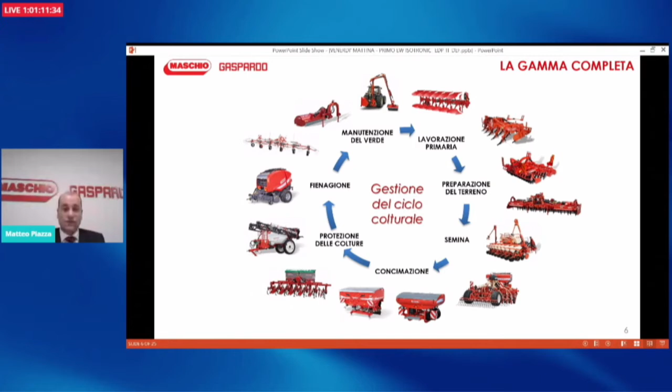So we can support our customers in all their activity, in the entirety of the cycle, the full cycle. Even though we've got long seasons, we can support our customers 365 days a year.

Now let me go back to the Primo spreader, which is the topic of today's webinar. So what are we discussing? There is a range of Primo products.

Primo is a spreader that was designed completely in our plants in Italy. It was developed, designed and manufactured. It is being manufactured in Italy.

We are now providing the market with a spreader that can be used in different circumstances, from 1,200 liters to 3,200 liters. So huge machines as well, which means that we can help private farmers, large companies, contractors.

And Primo is divided into three types. One is a totally mechanical machine, so regular manual settings, and one with some electrical motors added.

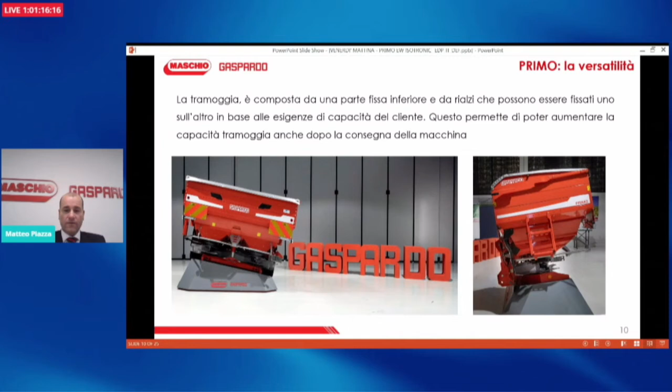If some years later the farmer buys a more powerful tractor in terms of lifting capacity, the farmer does not have to buy a new machine. It simply can use the same machine but with an expanded load capacity.

Now, this is the internal part of the machine. There are two removable grates which are here.

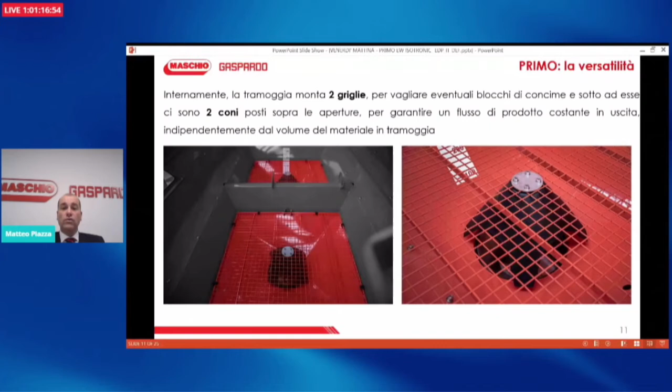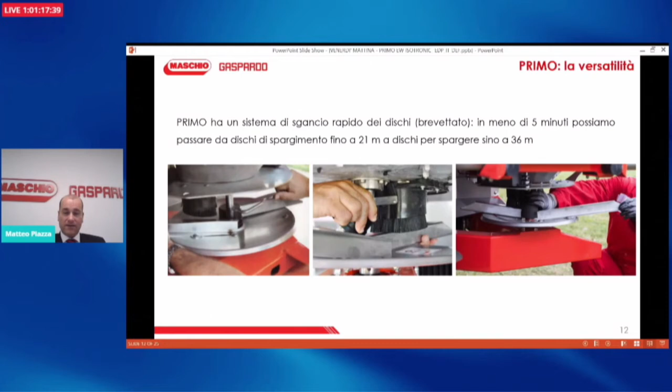It's a quick release system, so you can change discs in less than 5 minutes, from a 21 meter disc to a 36 meter disc. In just 5 minutes, you can change from a 21 meter disc to a 36 meter disc.

Let me now go to the weighting. What do we mean by EW, electronic weighting? The configuration I'm going to discuss is the Isotronic, Primo Isotronic. This machine can work, can be retrofitted with isobus tractors.

The frame is made of two parts. The hopper is connected to the third point through these devices and pulleys, and there is this connection of the hopper so that the machine can be decoupled from the tractor mechanically, so that all the weight of the fertilizer and the hopper can be detached from the tractor. The weighting cell, where the whole weight is measured, is under the third point of attachment connection. So the whole frame, etc.

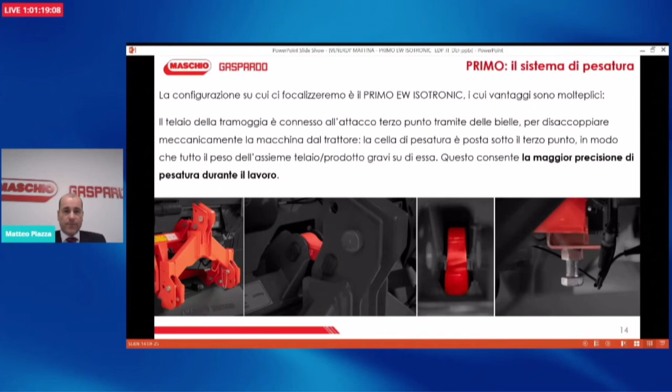This design allows a very accurate weighting. With one reading of the device, we can get the exact weight because of the design of the machine, so we can know exactly how much fertilizer is really being spread.

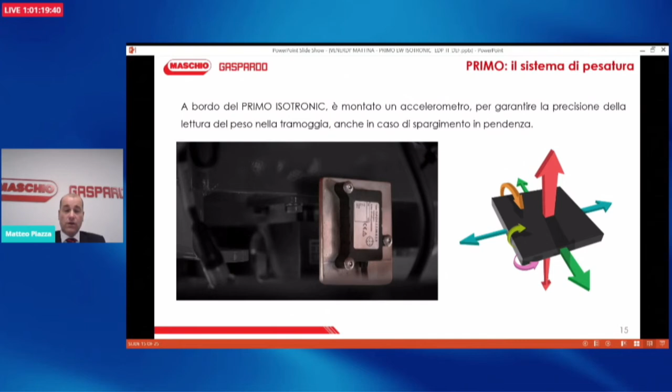Since this is a highly professional machine, we've also included in the standard machine an accelerometer. Why? Because we want to give farmers and customers the ability to spread in hilly terrain and flatlands with the same precision, since a single loading weighting cell can give us exactly the amount being spread.

Now let's go further into detail. A distinctive feature of the Primo is the use of two gates, as I was saying. Why have we used two gates and not a single gate?

We decided to use two gates, both with an electric motor, so that gate A is controlled by an electric motor controlled in speed, so in the minimum time I can open or close spreading, whereas gate B is controlled by a different electric motor, which is controlled based on position, giving better accuracy of the position on the actual cones of the fertilizer.

If we use the two electric motors at the same time, this combined use makes spreading really very accurate. It gives us assurance about the accuracy of the dose per hectare, but also the guarantee that the right amount of fertilizer is spread in all parts of the field.

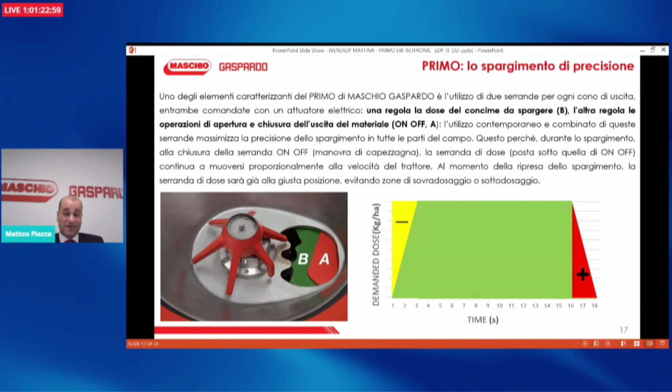On the right-hand side there is a plus. In that case, if I close the gate and I have a single gate, the gate requires time to close, so I would give more fertilizer than needed. So it's a real optimization of the dose per hectare, but also the uniformity across the whole field is ensured.

In this case, the spreading can be modified at any point. We call this Section Control Pro, because this further improves the accuracy and quality of the machine.

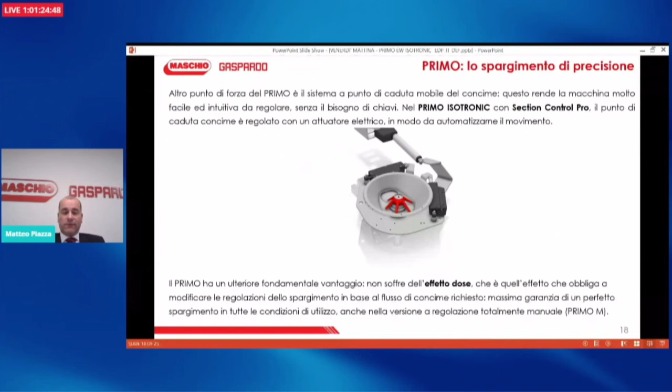An additional advantage on all sizes and versions, from the purely mechanical to the electronic machine, is that our system does not suffer from the dose effect. The dose effect is that which would force farmers to change spreading adjustments based on the flow of fertilizer. If the speed changes, say from 6-8 kilometers to 15 kilometers per hour or even more, since the distribution system is proportional to the speed, the higher the speed, the more I have to open the gate of the dosing gate.

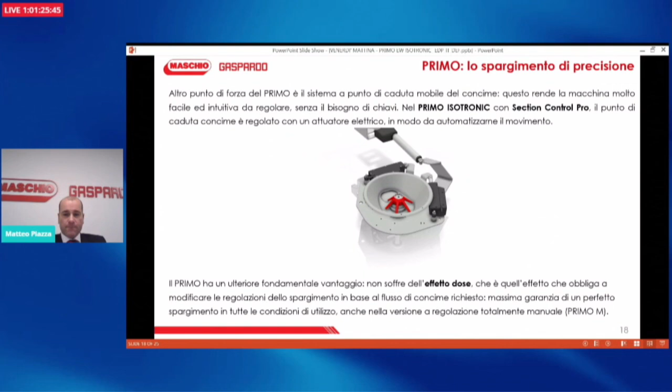In our spreader, in our machine, the speed of the tractor is not necessarily connected with a different adjustment or setting of the spreader. Not necessarily. So we don't suffer from the dose effect, which means that even with the mechanical machine, we can ensure the best possible spreading.

Now I would like to focus on the Isobus system. We have built the application software of the Isotronic Primo. This Primo machine is called Isotronic, in line with our Isotronic planters. The software was developed and designed by our own engineers, and we can support this software.

Our customers are always now asking us to spread where they want and in the amount they want. With the Isotronic system, farmers can also benefit from the tax reliefs of Industry 4.0. Also, this is an AEF certified machine - Agricultural Industry Electronics Foundation.

Precision farming, what does it mean exactly? Well, it means spreading, distributing, delivering the amount of fertilizer I want, where I want. Thanks to the automatic management of dose and of the dropping point, with Primo you can control sections very well. In this case there are 8 sections, 4 on the right and 4 on the left.

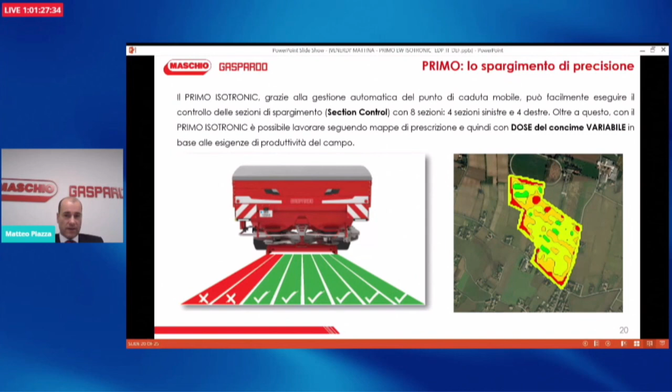And since now we have an electric gate control, we can also have variable dose or variable rate. So really, step by step, all the needs of the customers can be met.

Another very important thing is that when we started the Isotronic product, our customers said, okay, this machine is very good, it's performing very well, but we must have the opportunity to have settings and adjustments everywhere, even without paper.

So we thought of an application which can be downloaded free of charge on all devices, iOS and Android. By adding some important rating parameters, like the type of fertilizer, the speed, the dose, the type of terrain, etc., we can obtain, wherever we are, the adjustment and settings of the machine, so that this data can lead to a maximized operation.

This app is updated yearly with new tables based on new fertilizers, because each fertilizer has a specific set of recommendations. Through this app, customers can really rely on the data that they require, just on their devices.